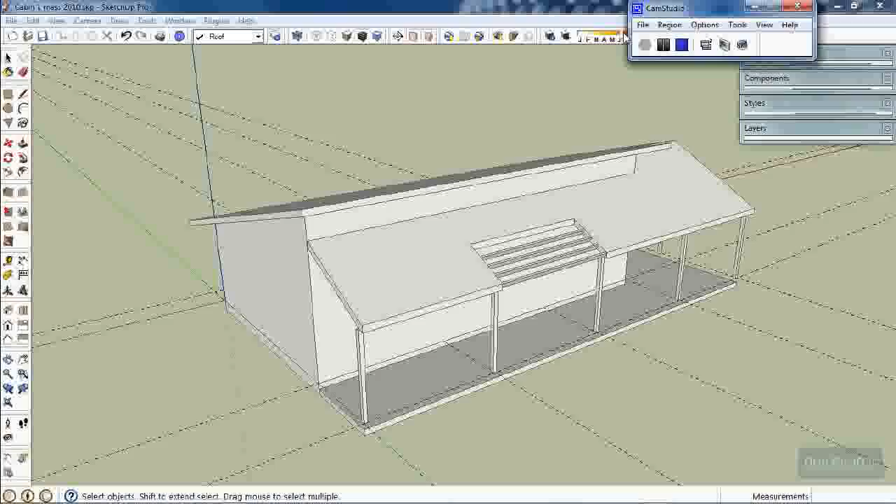Okay, so I've gone back to my other option there with the purlin shaped members. What I'm going to do, you can please yourself now. You can sort of play with little bits and pieces here, and everyone's probably going to come up with some different options in this regard. I'm just going to show you something else that you might do, and you can choose different options from this. But I'm just coming up at 2400 or so.

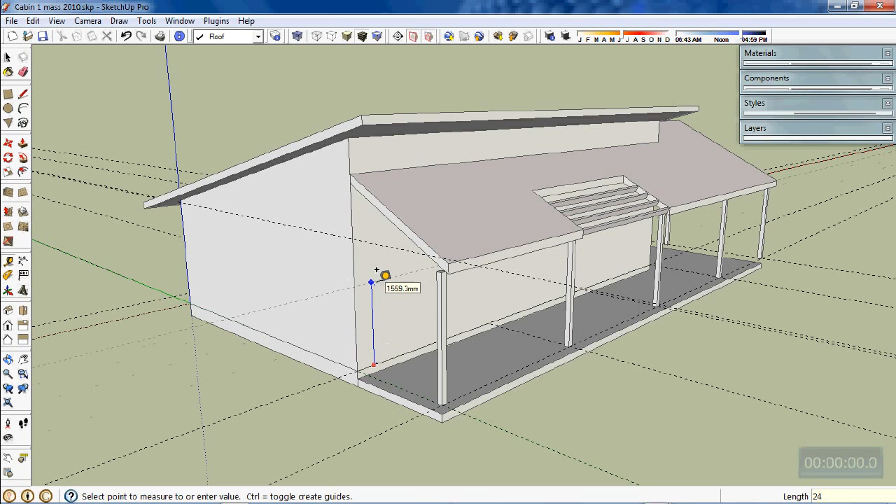I intended this is the northeastern corner of the building here, so it might be nice to let some morning sun in, and we'll be able to analyse how much comes in a second when we do some sun shading. So I'm just doing a small amount of cropping. I'm just going to crop this corner using my tape measure.

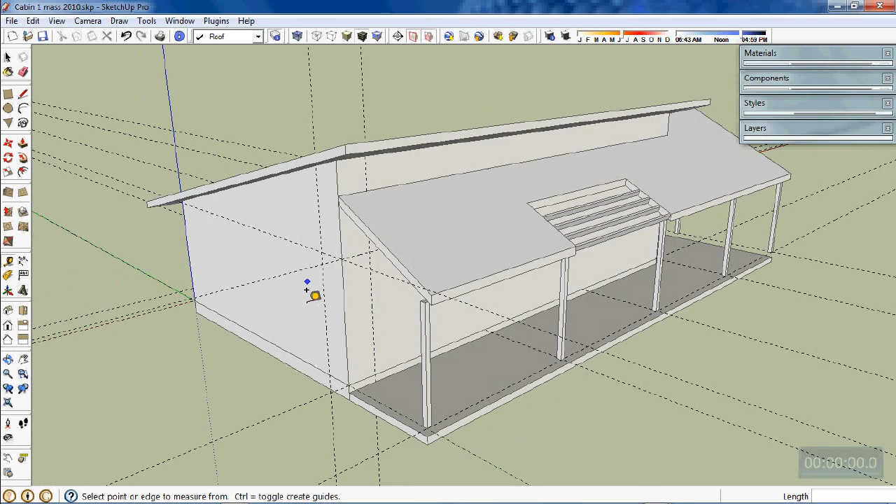I've set out a certain distance there. I've just come 600 back from the corner in both directions, and I've come 2400 up. I'll change to the wall layer, and I'll pick up my pencil, and I'm just going to trace off that shape that I've done.

And down to there. And before I do anything more here, I'm also going to go across there, even though you can't see the line that I've just drawn, and the other one there, and then I'm going to start deleting some things. Just that line there. Yeah, that's all I want to do. Now I'll clean up the construction lines.

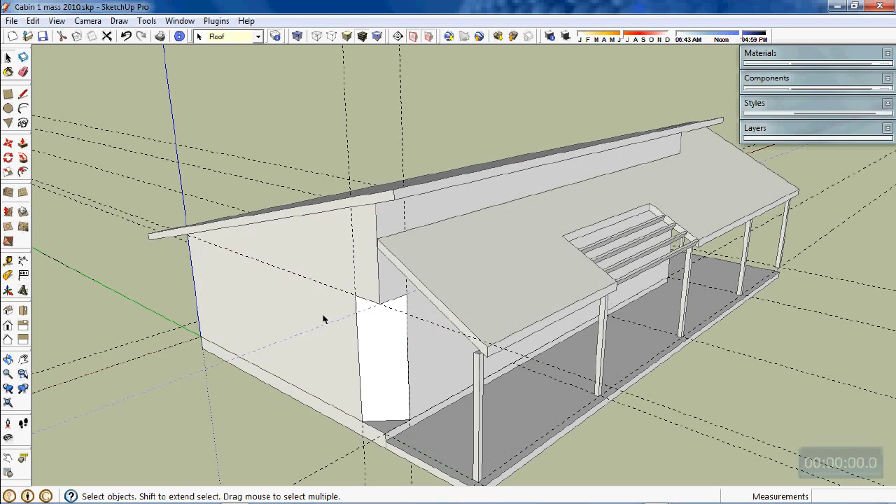So I'm just intending to leave the roof structure above 2400 as it is, so we could build some outrigger, some cantilevered lintel members into the wall frame that would cantilever that 600 and still support the roof loads. That's quite achievable. And we might just truncate that and then make this a big glass opening into the northeastern corner possibly. We'll have a look at what effect that has when we do some sun analysis in a second.

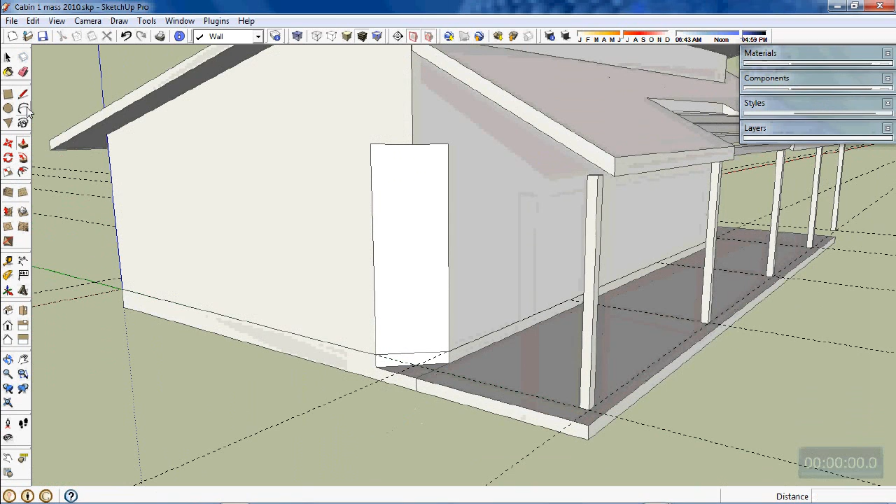So I'd then probably decide that I wanted to pull this surface back down in line with there and clean up some of the lines for the slab. So it would look something like that possibly. So it's just something to play with. I'm not too sure at this stage if that's a good idea or not, but that's the whole idea of having a go at a few things and then running some analysis on it.

The other thing that I might do too is for the entry door, this is another option that you may or may not choose to do. I'm going to pop the entry door in a bit, so there's a bit of an opening setback in the front wall at the entry door level.

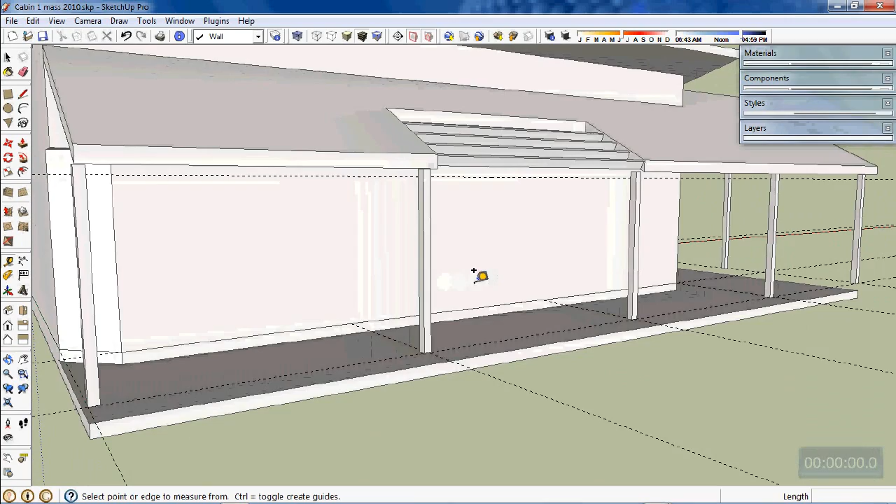So I'll probably come up 2100 as a standard joinery line off the slab. That line's gone in there nicely, yep. And so I also want to come probably from this back wall here, I guess, just to establish that was 3600 to that point again. And another 3600. So that's just establishing where those main grids are on the wall.

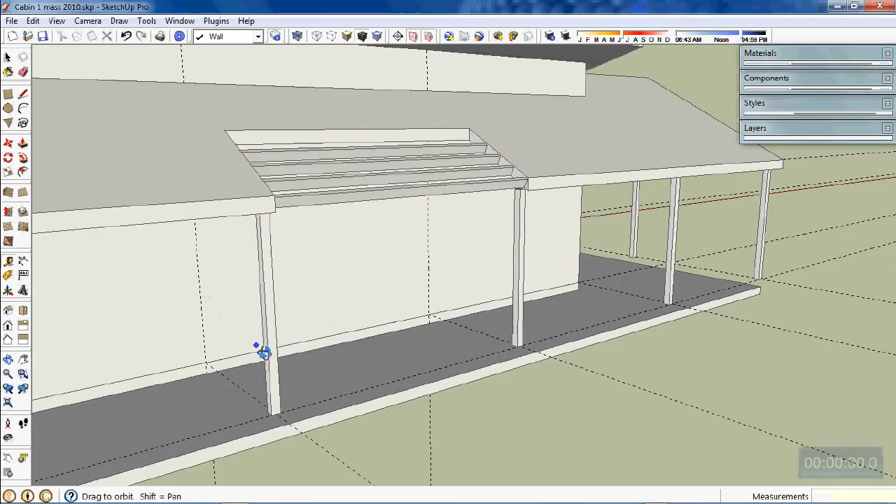Later on, when we start to document this building, I'm going to suggest that we actually break up this wall face into 1200 panels and use some material like Scyon Matrix or something like that, one of the new James Hardie expressed facades. So I'm just going to come up, those sheets come in 1200 wide sheets, so we'll put a couple of 1200s there.

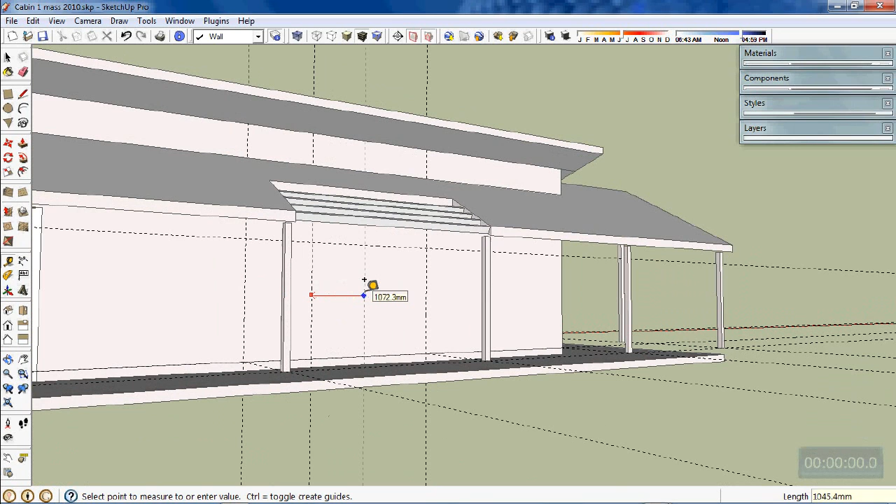Okay, and I'm on the wall layer, so I'm just going to break this wall shape up now around the front door. So you can imagine this is going to be the front door line through there, so I'll clean up the construction. I just set up those construction lines merely to be able to set out that, much like what a builder would have done to be able to set out some shapes on site too.

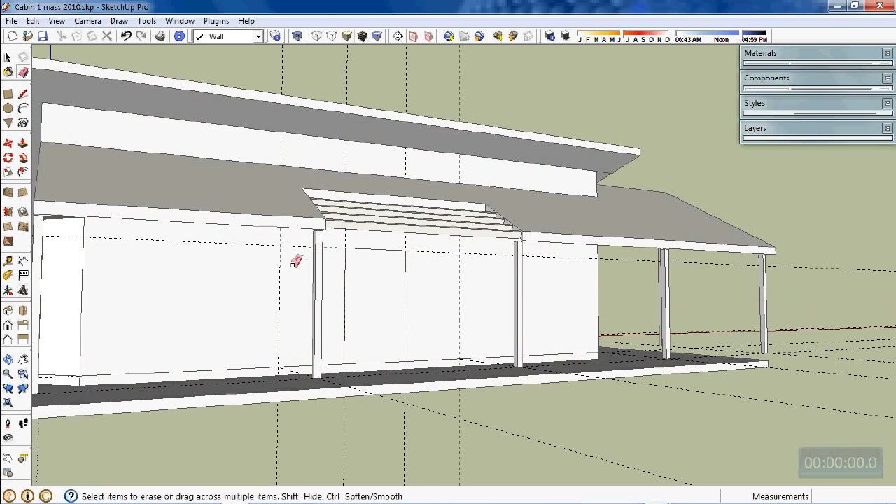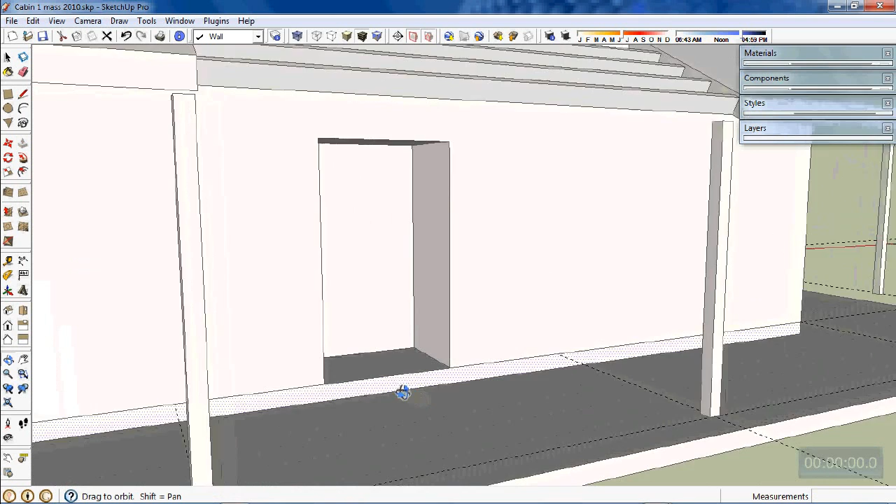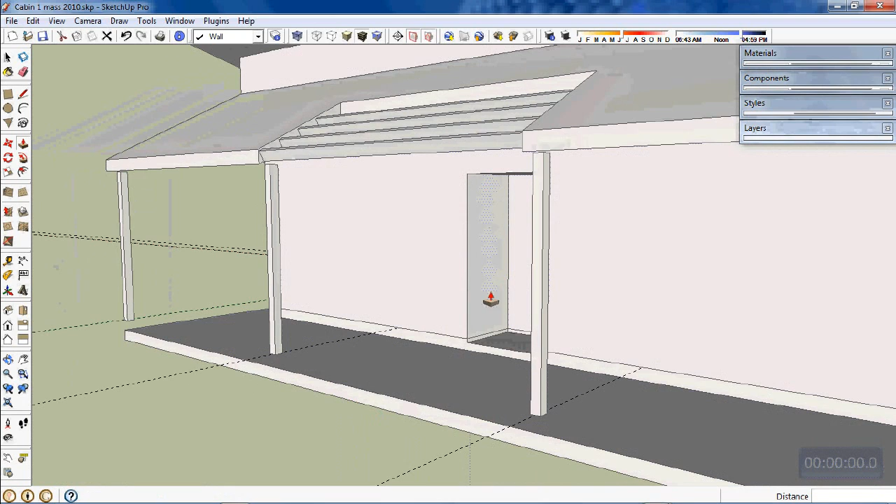I'm going to stop the video again, and then when we start back again on the next video, we're going to have a look at how we can analyse how the sun's going to penetrate into this building.